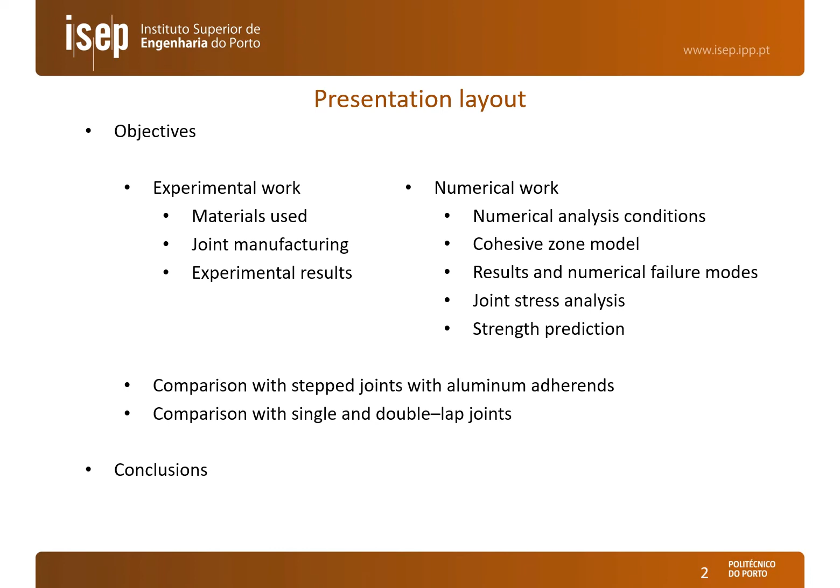In this slide we can see the layout of the presentation. We will start by presenting the objectives. We will divide the work mainly into experimental work and numerical work. In the experimental work we deal with materials, manufacturing of the stepped-lap joints, and analysis of the experimental results. In the numerical work we focus on strength predictions by cohesive zone modeling, including joint stress analysis and finalizing with strength prediction. As the last two topics, we compare the results of the stepped-lap joints with aluminium adherends, and we also make a comparison to single and double-lap joints. In the end, we will finalize with the conclusion.

Here we can see the objectives of the work. We are going to manufacture and study experimentally stepped-lap adhesive joints with composite adherends. We are going to make a numerical study by CZM of these joints. We are going to study the influence of different adhesives and also of the overlap length. We are going to compare the experimental and numerical results to understand the behavior of the joints, and we are going to compare the composite joints with aluminium joints and also with two other typologies: single-lap joints and double-lap joints.

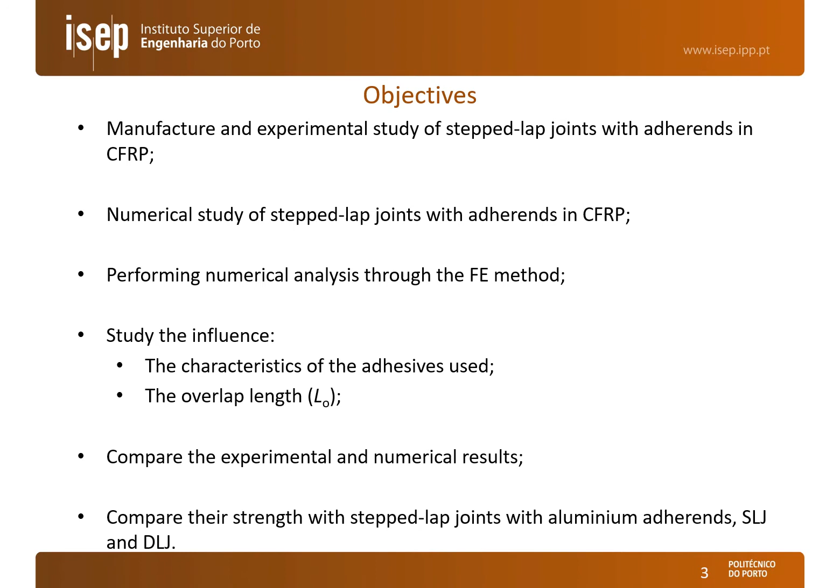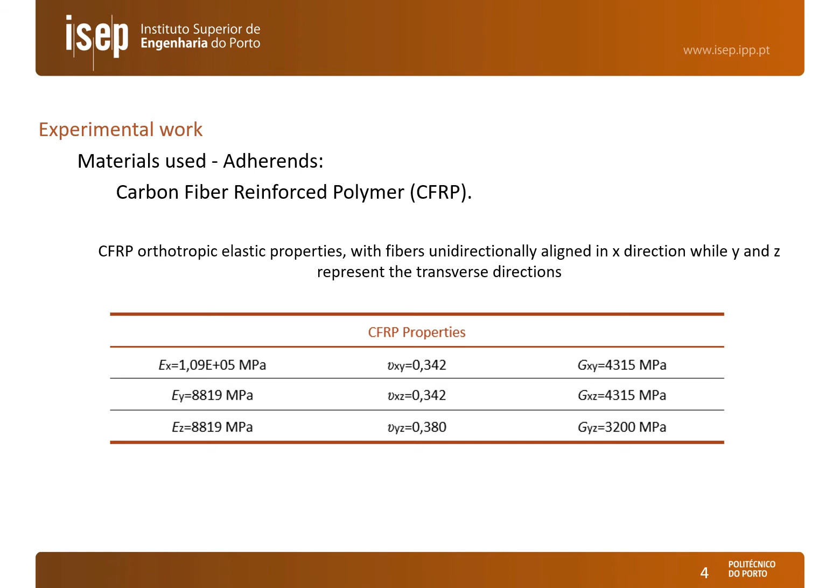Beginning with the experimental work, the adherends are made of carbon fiber reinforced polymer. We can see in this slide the orthotropic elastic properties that were used in the numerical simulations to model the material.

In this slide, we can see the three adhesives used as a benchmark for the adhesive joints. The first one, the Araldite AV138, is a brittle adhesive. The 2015 is an adhesive with smaller strength than the former one, but with higher ductility. Both of these adhesives are epoxy-based. Finally, we test the polyurethane SikaForce 7752, which has smaller strength than the Araldite adhesives, but is much more ductile.

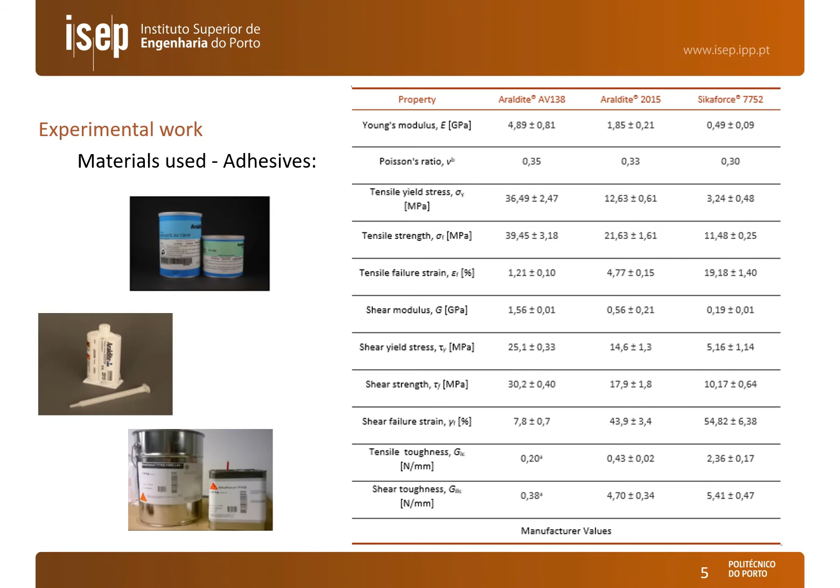We can see in the figure the geometry of the stepped-lap joints. We are using a three-step configuration. With this geometry, the adherends are in line with each other, so there is no eccentricity, and we can see the main dimensions of the joints, with emphasis on the overlap length, which was the varied parameter in this analysis, with values between 12.5 and 50 millimeters.

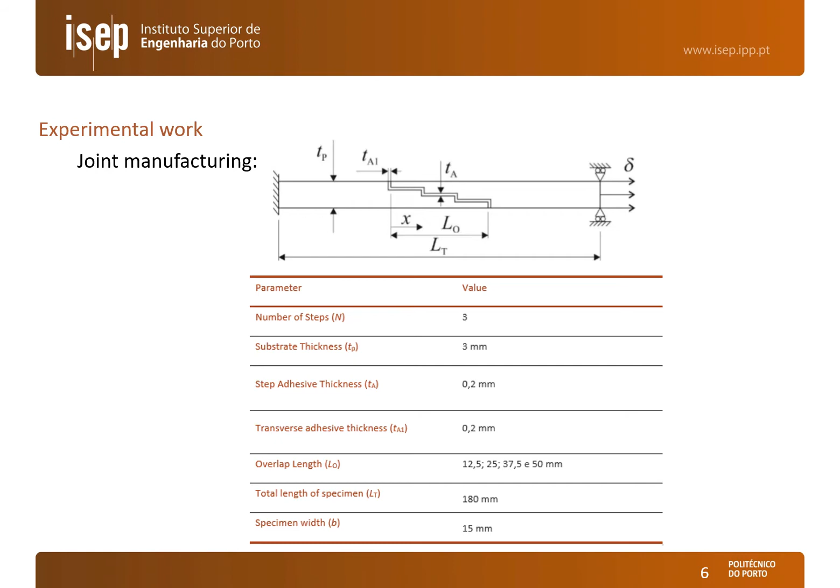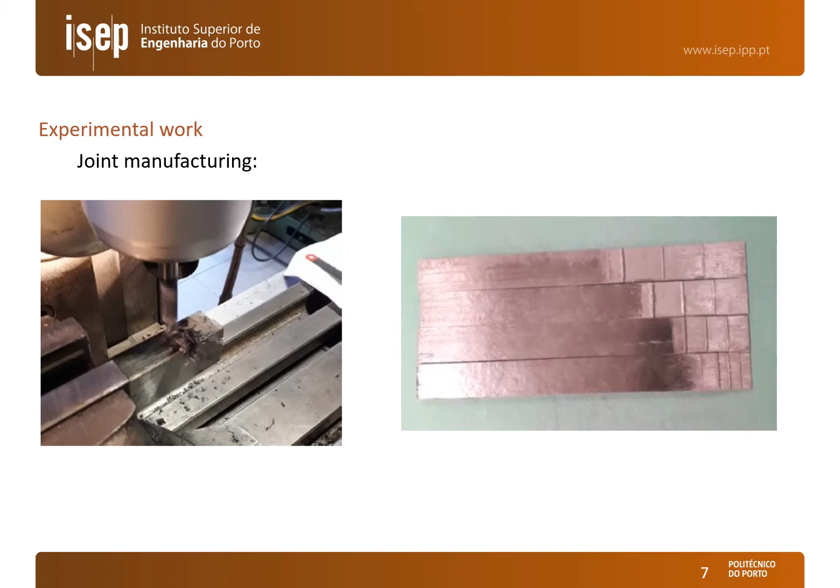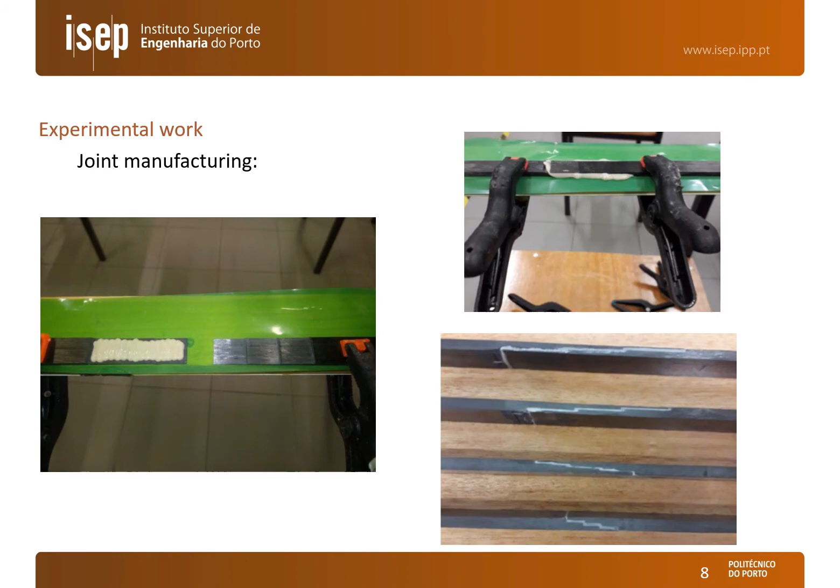Some details on the manufacturing of the joints. We can see milling of the steps in a composite adherend using a conventional milling machine with a carbide tool, and the end result to the right, showing the three steps with 4 different overlap lengths. Here we can see details of bonding to the left. In the upper image we can see the apparatus for bonding the joints, and in the lower right figure the complete and prepared joints ready for testing, one joint for each overlap length.

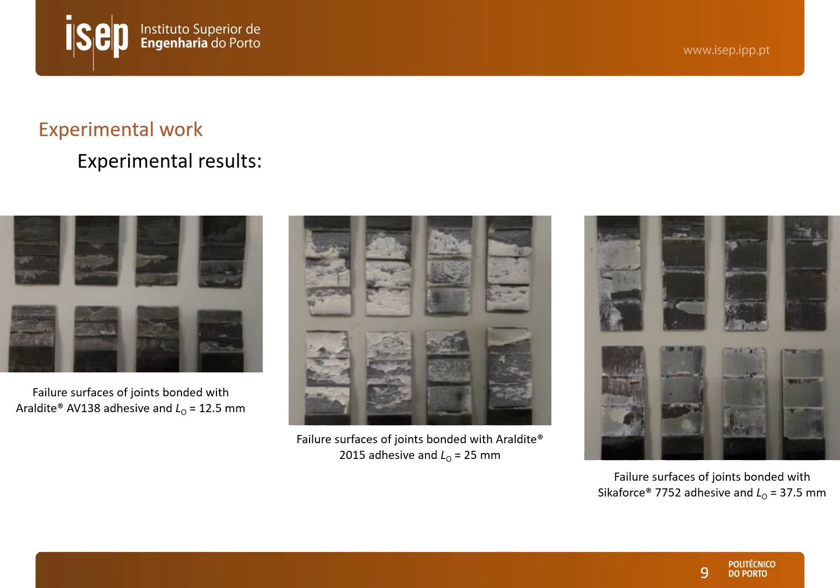Regarding the results, we begin by showing the failure modes, one figure for each adhesive and just one example of an overlap length. We can see that failures were mostly cohesive in the adhesive layer, but in some conditions we also had concurrent interlaminar failure of the composite. But mainly, failure of the joints took place by cohesive failure of the adhesive.

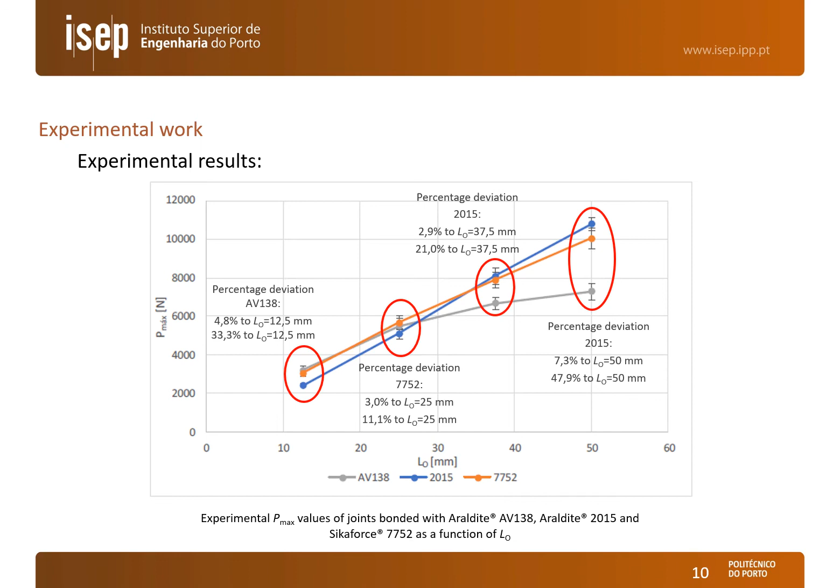In this figure we can see the maximum load as a function of the overlap length for the three adhesives. We can see that for the shortest overlap, the AV138 and the 7752 behave best and very similarly. However, as we increase the overlap length, the 2015 and 7752 continue to increase in strength by a large amount, while the AV138 falls short of the other two adhesives. This is because of the brittleness of this adhesive, as we are going to see in further slides in this presentation.

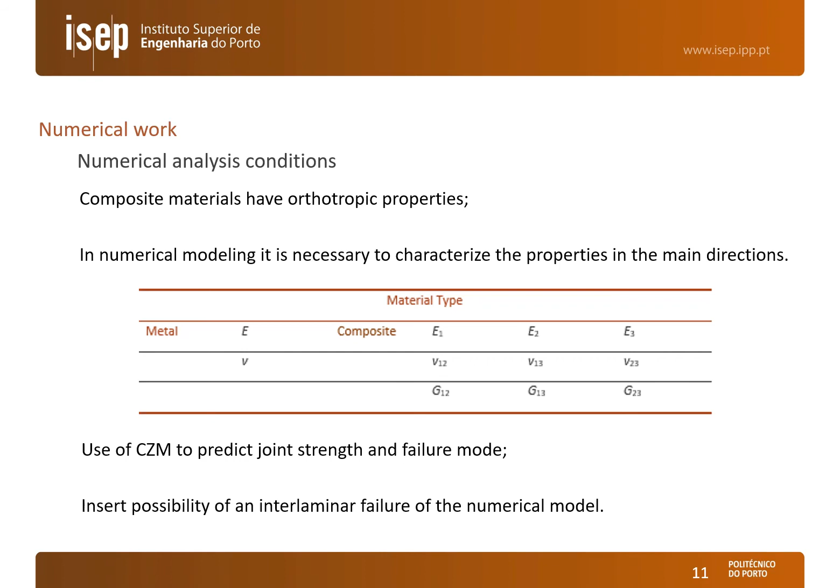The numerical work consisted of using cohesive zone modeling for strength prediction of the step-lap joints. As I said, the composite materials were modeled as orthotropic, and for this purpose we need the properties presented in this table. For metal we consider only an isotropic material, but for composite we have to consider the different properties along the three orthogonal directions. We used CZM with a triangular law to predict the joint strength and the failure modes, and we included in the models the possibility of interlaminar failures at several locations along the joint.

The numerical simulations were carried out in Abaqus in 2 dimensions. We consider the quadratic damage criteria for damage initiation, an energetic criterion for damage propagation, and the elements used to model the adherends were CPE4R plane strain elements, and COH2D4 cohesive elements for the adhesive. We can also see some details of the boundary conditions of the partitions created to model the adhesive in the lower figure to the right, and an example of stresses in the joint during loading.

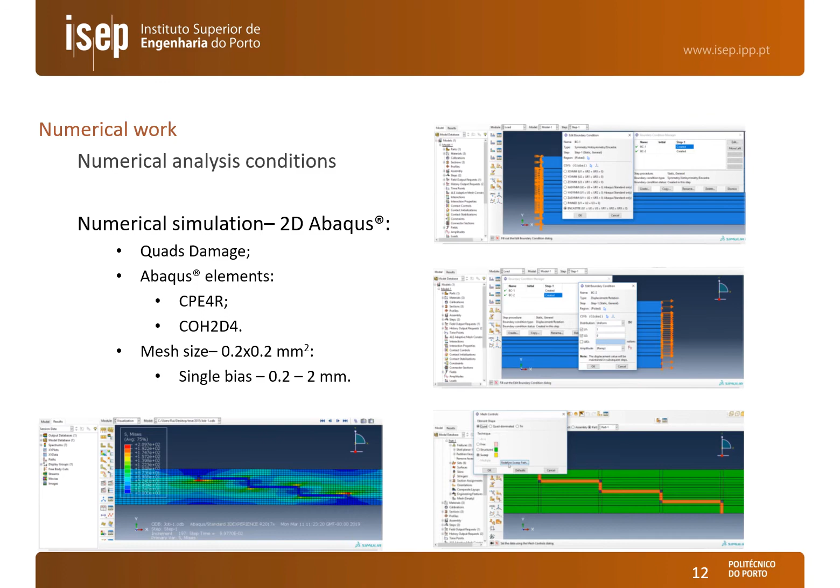As I said before, we use a triangular cohesive zone model, and these are the main equations that depict the behavior of this triangular model law. We consider a linear elastic behavior up to the cohesive strengths Tn0 and Ts0, cohesive strength in tension and shear respectively. We consider the quadratic stress criteria for damage initiation based on the current stresses, and a linear energetic criteria for damage propagation, as seen in the last equation of this slide.

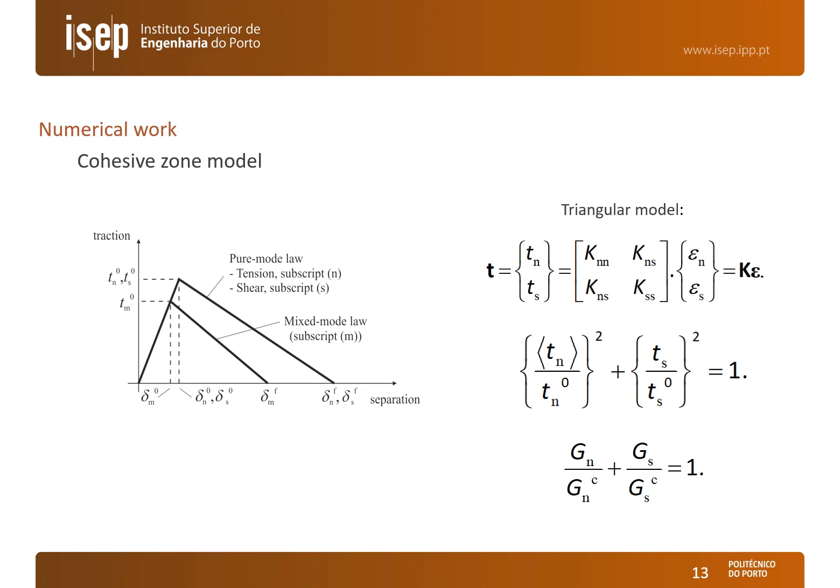Beginning with the numerical results, here we can see the different failure possibilities that were introduced in the model. Location 1 and 2 are the butt portions of the step lap joints, 1 at the edges and 2 in the middle step. 3 represents the outer steps, and 4 the inner step. And finally, location 5 is the interlaminar failure of the composite.

We can see in the table a summary of the failure modes observed for each of the 3 adhesives and for the different overlap lengths. We can see first that the 7752 did not show interlaminar failure, denoted by number 5, while AV138 and 2015 had interlaminar failure of the composite during the failure process, but it should be emphasized that final failure always took place through the adhesive cohesively.

We can see that we have a more or less consistent behavior for all conditions, in which first we have failure of the butt portions 1 and 2, and then we have failure of the steps denoted by numbers 3 and 4. The main difference here was the absence or not of interlaminar failure.

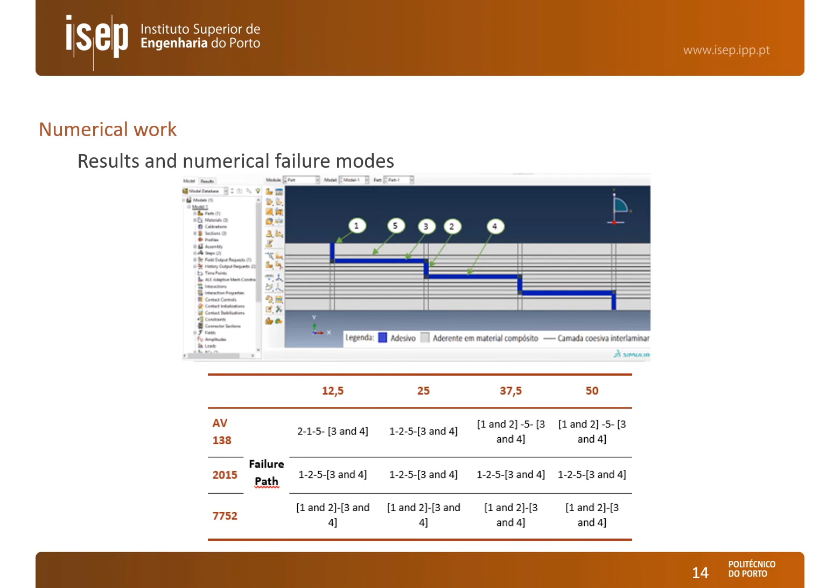We also performed a short stress analysis to try to understand how the stresses vary with the overlap length, and here we can see as an example the peel stresses for the Araldite 2015. We can see that we have major positive peak stresses at the overlap edges and compressive stresses in the middle at the edge of the middle step, and in most of the region in the middle of the steps we have nil or close to nil stresses.

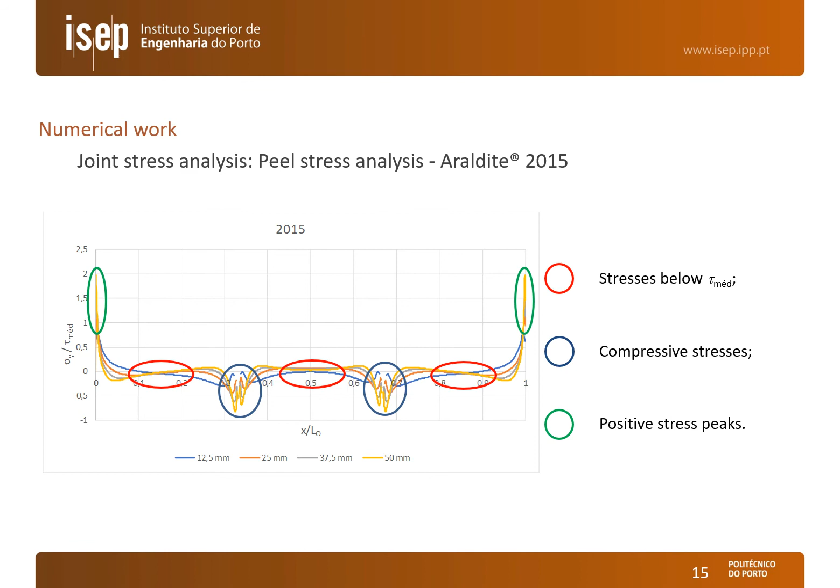We can also see that the peak stresses tend to increase as we increase the overlap length, and this is why the joints with the AV138 could not get a high strength for big overlaps.

Here we can see the same study, but now considering the shear stresses for the same adhesive. We can see clearly the different steps along the overlap length, and we have a similar behavior between steps. Within each step, we tend to have peaks at the overlap at the step edges, and this is due to the shear lag effect that is widely known for single lap joints.

And we can also see that as we increase the overlap length, we have increased peak stresses compared to the average shear stress in the joint.

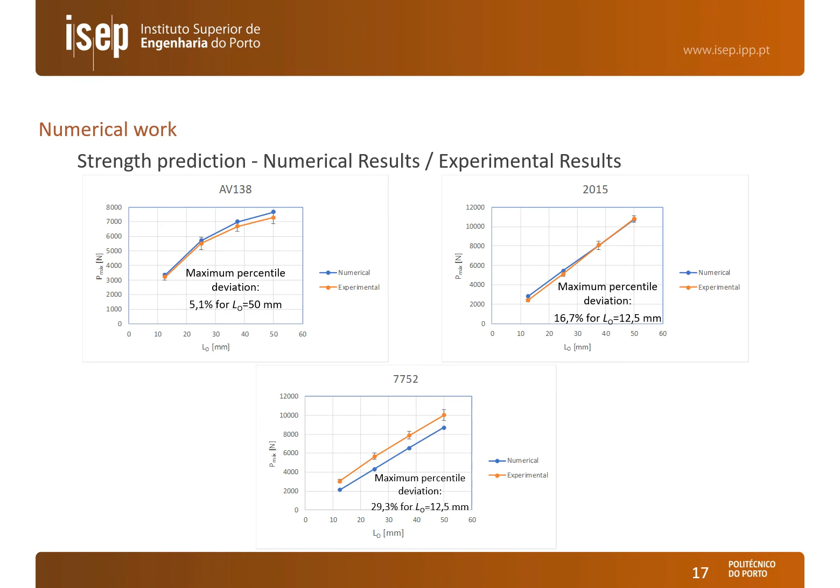Opposed to these results, we have higher deviations for the 7752, almost 30%, and this is due to the fact that this adhesive is very ductile and that we are modeling the behavior of this adhesive with a triangular cohesive law.

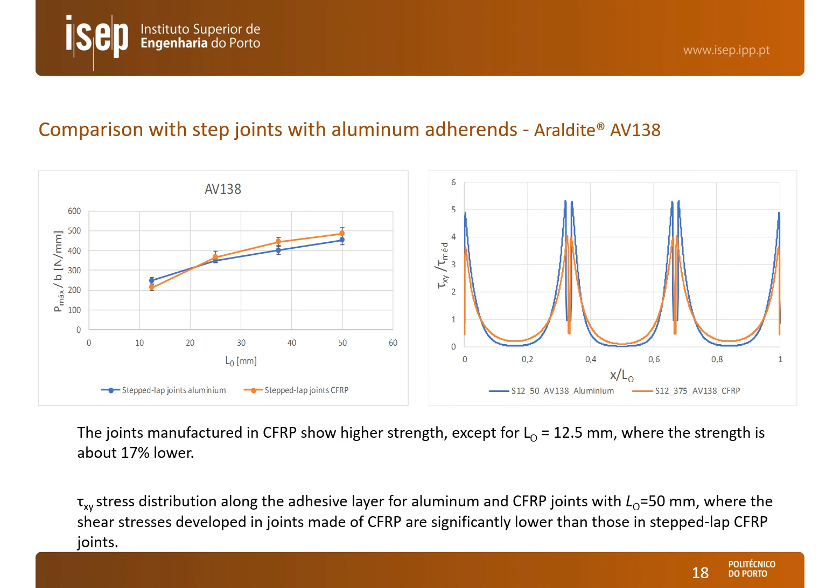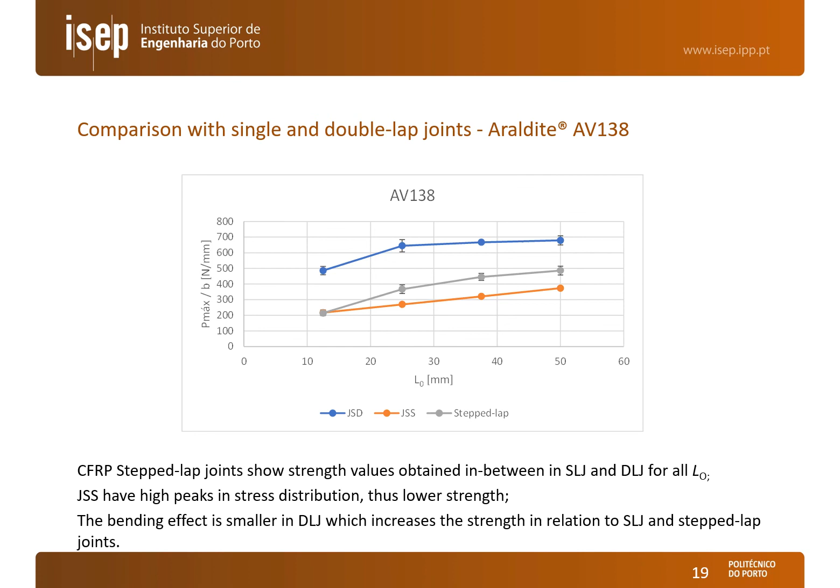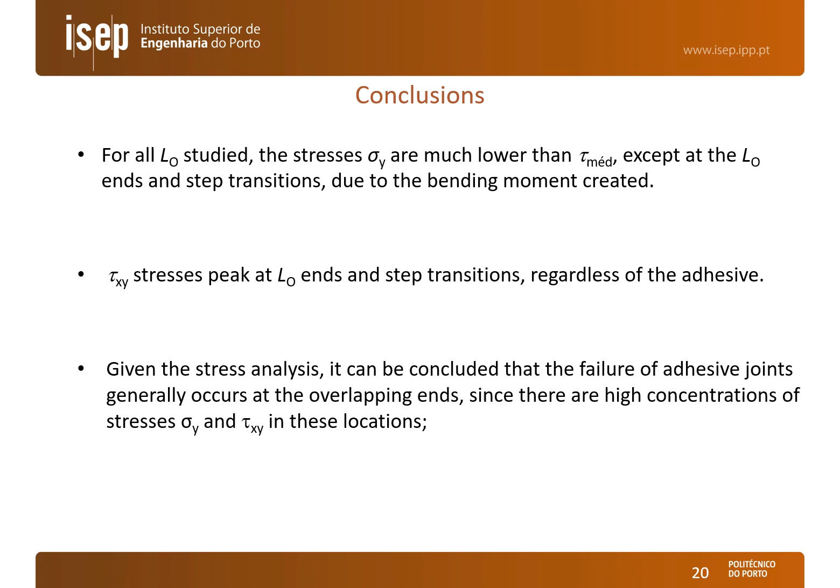To conclude, regarding the stresses, typically peel stresses are much lower than the average shear stress, except at step edges. Shear stresses peak at the overlap and step transition edges, regardless of the adhesive, and we have high stress concentrations that increase with the overlap length, which tends to affect the results.

The CCM technique was validated. Good results were obtained, especially for the two Araldite adhesives, although for the Sikaforce the results were not so good, but this was already addressed in the explanation.

Comparison between composite and aluminum joints typically gave a better result for the composite joints, except when interlaminar failure took place, which weakened the respective joints.

We also concluded that the step lap joints behave better than the single lap joints, but fall short of the double lap joints by a large amount, since this joint, although having a better stress concentration effect, also has double the shear area. So this results in the best results between the three types of joints.